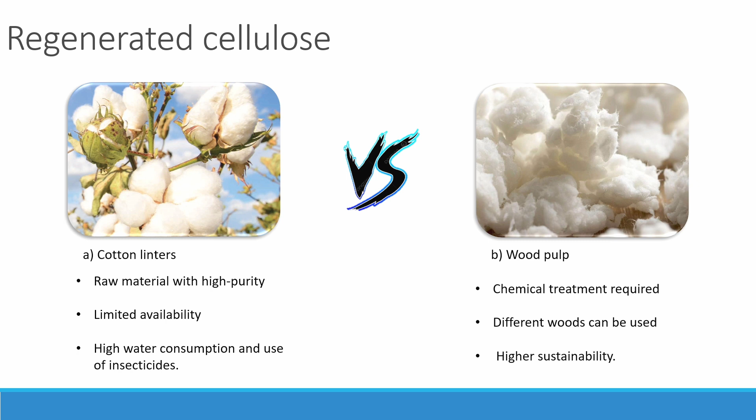Dissolving pulp is a raw material to produce regenerated cellulose. These are the 2 types of raw materials that can be used. On the left side, we have cotton linters - high purity cellulose fibers already, requiring less chemical treatment compared with wood pulp. However, the textile market is increasing, and there's difficulty scaling up cotton linters, maybe because of the use of insecticides and water consumption.

On the other side, we have wood pulp, already talked about a lot in this event, which requires higher chemical treatments. However, we have advantages that we are exploring.

Dissolving pulp by the prehydrolysis kraft method is the objective of my PhD study. We already have some studies about the valorization of hemicellulose removed during the prehydrolysis, and I will also present later the valorization of lignin. The objective is to produce a cellulose fiber with high cellulose content, as already talked about before.

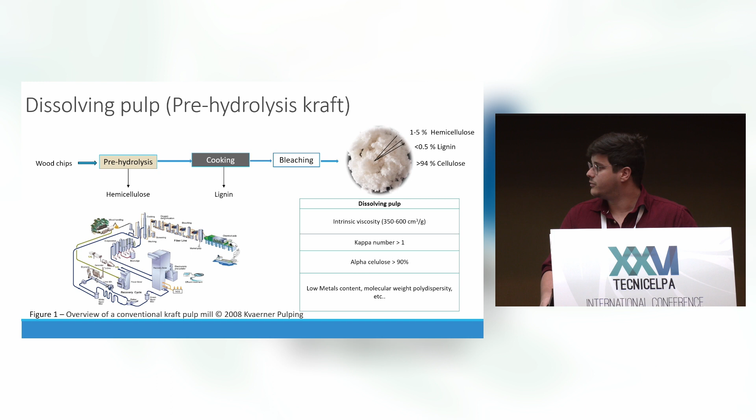We have specific conditions to produce a good quality dissolving pulp, such as the intrinsic viscosity that was shown in the other room - the importance of this parameter to dissolve it. The kappa number must be low, alpha cellulose must be higher, and it's important to have low metal content, focusing on the recyclability of the solvent used to dissolve the pulp.

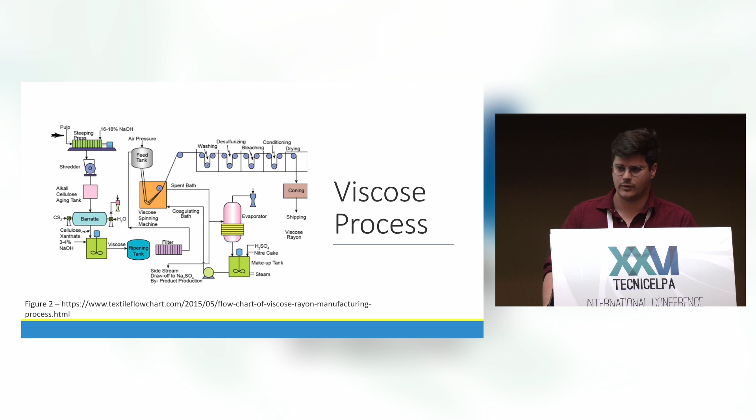So we are working a bit with the viscose process, where we use carbon disulfide to dissolve and produce the dope of the fibers. The dope is then, by electrospinning for example, regenerated and washed in the later phase.

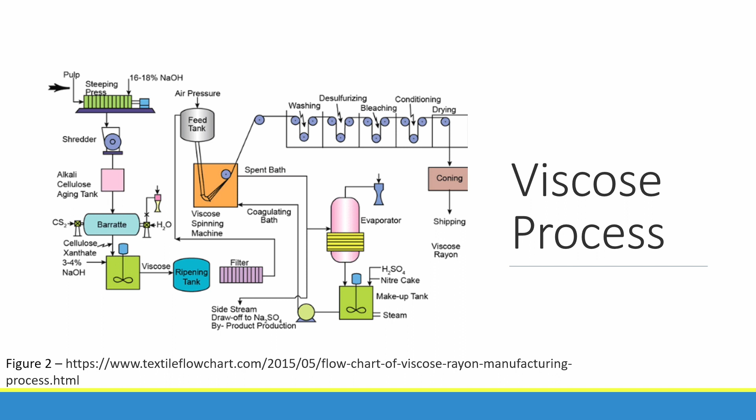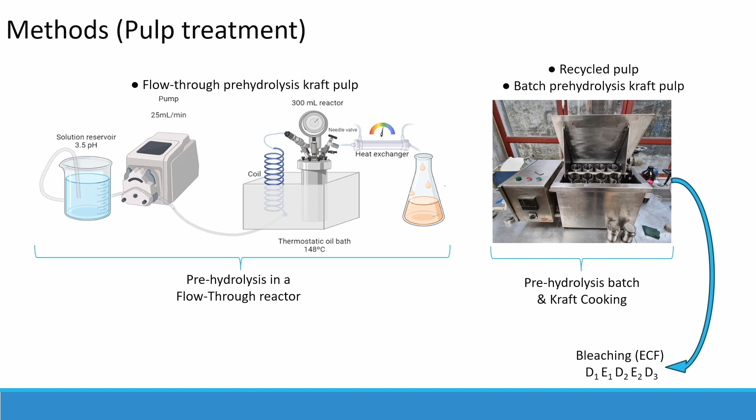The other part of the project, we worked with recycled pulp - pulp at the end of its life of utility. It has specific characteristics that are more difficult to work with. For both pulps, we did the kraft cooking in the batch system, so the only difference is the prehydrolysis reactor.

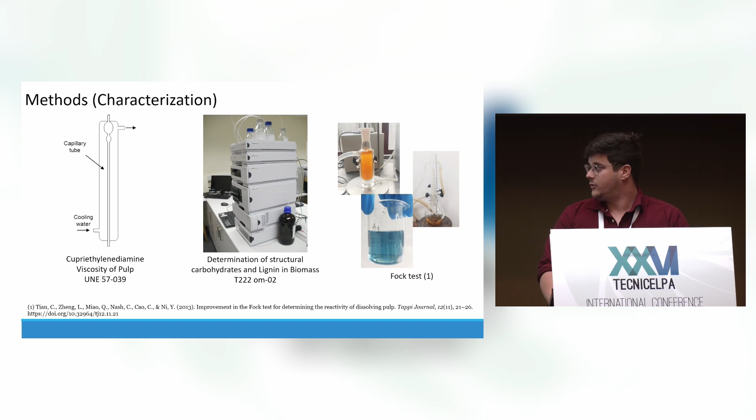Regarding characterization, as I mentioned before, it's important to follow the viscosity of the pulps. We also studied the composition of the pulps, and we did the Fock test, which is a mini scale version of the viscose process.

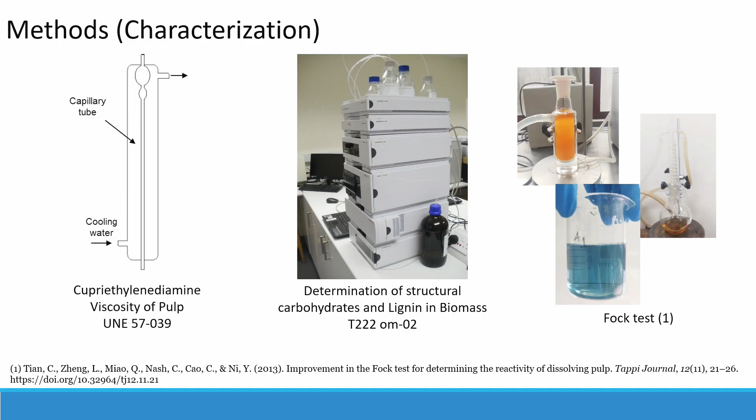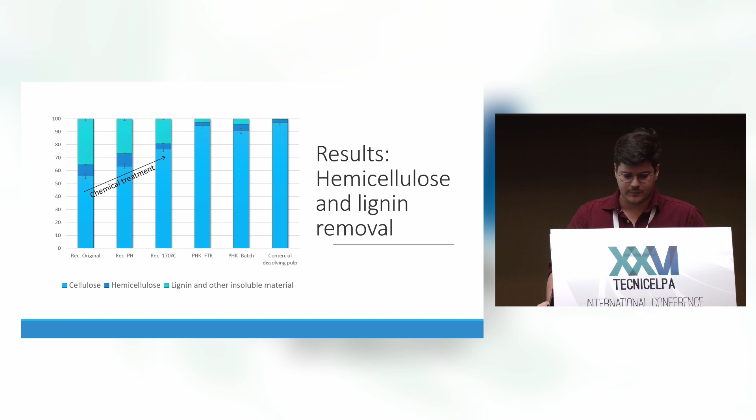When comparing the flow-through and the batch system employed in the prehydrolysis sequence, we can see that the flow-through reactor has produced pulps with higher cellulose content. That was one of the objectives and one of the interesting results of employing this prehydrolysis.

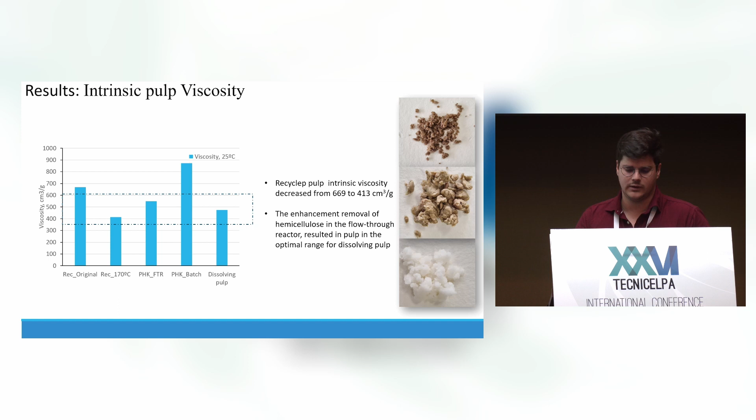Regarding intrinsic viscosity, we can see that the treatment employed in the recycled pulp decreased the value to a better quality, aiming for dissolving pulp, so between 350 to 600. The prehydrolysis kraft with the flow-through reactor also reduced the intrinsic viscosity to optimum values to produce dissolving pulp.

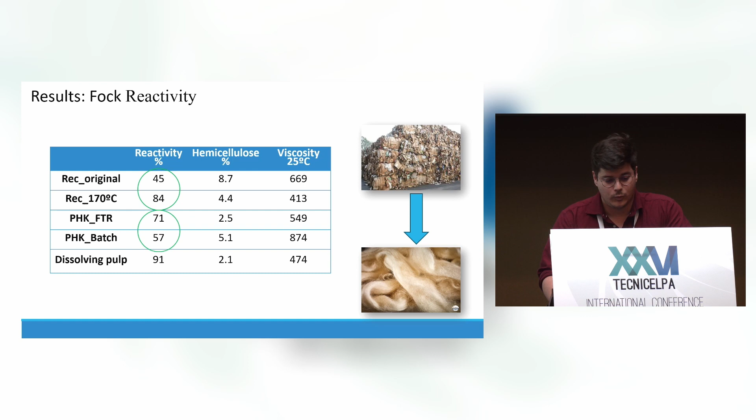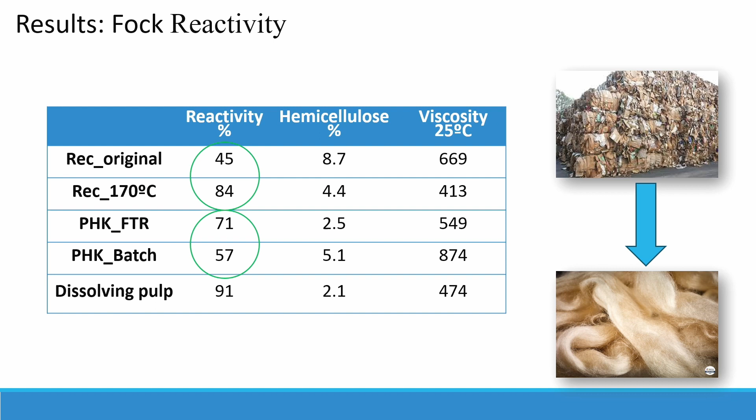Regarding reactivity, we have interesting results, particularly with the recycled pulp. We almost doubled the FOCK reactivity of this pulp when employing the two chemical treatments. One interesting point is that we cannot remove a lot of hemicellulose in this process due to the characteristics of this pulp; however, due to reduced viscosity, we have this increase in reactivity. Regarding the flow-through, as seen before, it's a pulp with higher purity, and this translates into higher reactivity. They're still a bit far from commercial dissolving pulp, but it's a method we need to optimize.

This is where the future work comes in. One of the interesting results was the increase in FOCK reactivity in the recycled pulp, so we can produce pulp from end-of-life pulp and enter the circular economy with this type of pulp.

Regarding future works, we'll try to individualize the different pulp characteristics, such as kappa number, crystallinity, porosity, and surface area, that can impact the FOCK reactivity, and try to individualize the different aspects of it.

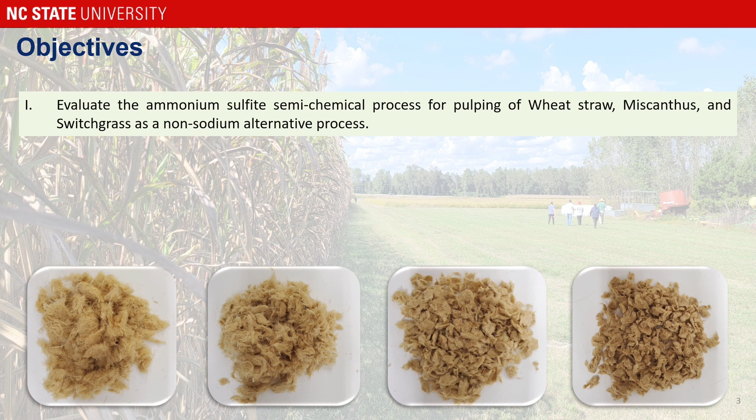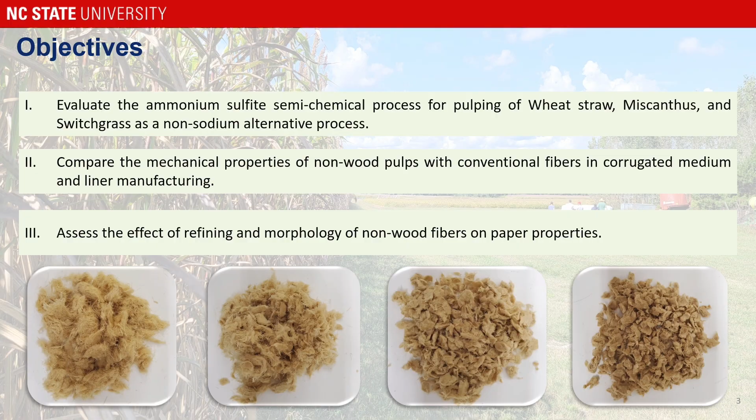The second objective is to evaluate the mechanical properties of these fibers to be used in corrugated medium and liner manufacturing. We also want to evaluate the morphology of those fibers and what kind of relationship it has with the mechanical properties of these grades.

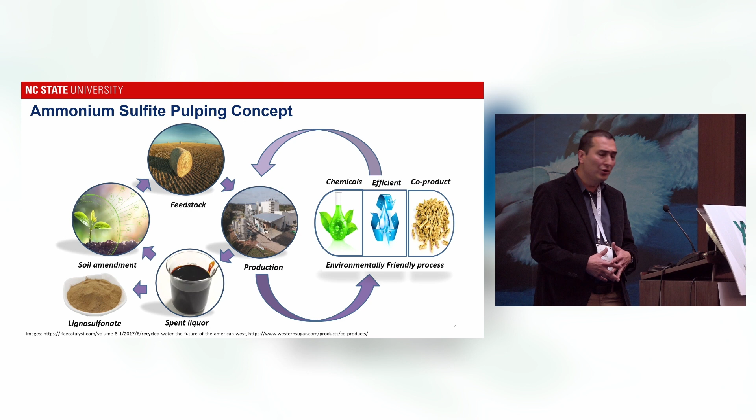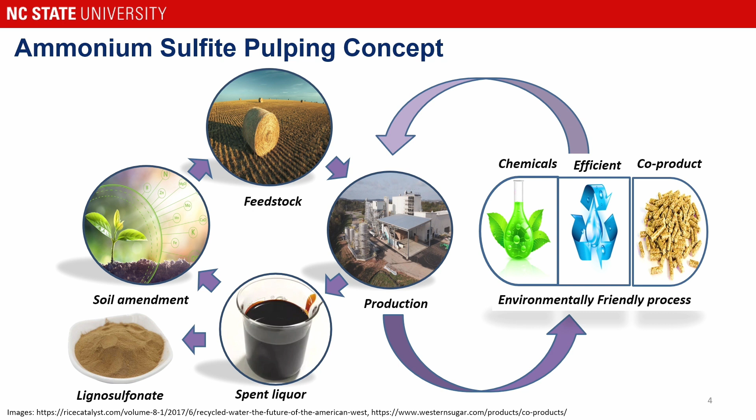As an overview of the process, you might wonder why we are using ammonium sulfite on non-woods. The reason is because we can integrate a more environmentally friendly process for non-woods at a small scale. As in a previous presentation, you might know that sulfite can be used in a pulping process, and we can obtain a spent liquor to be used in different applications. For example, the spent liquor from the sulfite process could be used as a soil amendment, or we can obtain more valued products such as lignosulfonate from this spent liquor. So basically, this is the idea.

As a methodology to evaluate this feedstock, we are using a systematic way to test these feedstocks. First, we did a pre-treatment of the feedstock, including hammer mill and screening.

Then we applied different conditions to obtain the fibers, doing a pulping using a systematic way: 50% of the total SO2, a liquor to wood ratio around 4 to 1, and a temperature of 170, which are common process conditions to obtain pulp.

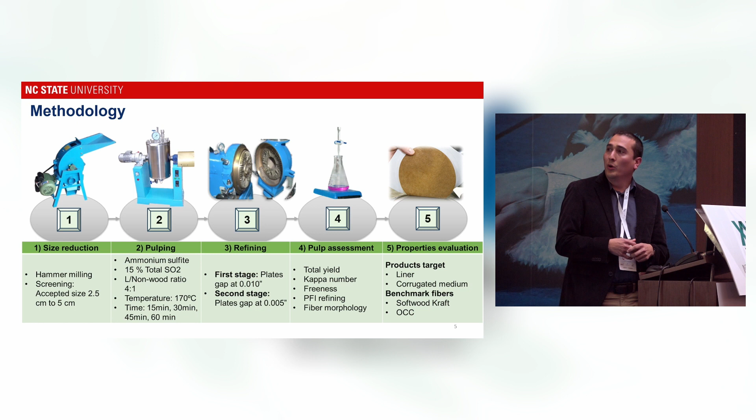As you can see, we are changing the cooking time, and we want to see the effect of cooking time on those pulps. After pulping, we refine those pulps using 2 stages, and we evaluate total yield, kappa number, refining behavior, and fiber morphology.

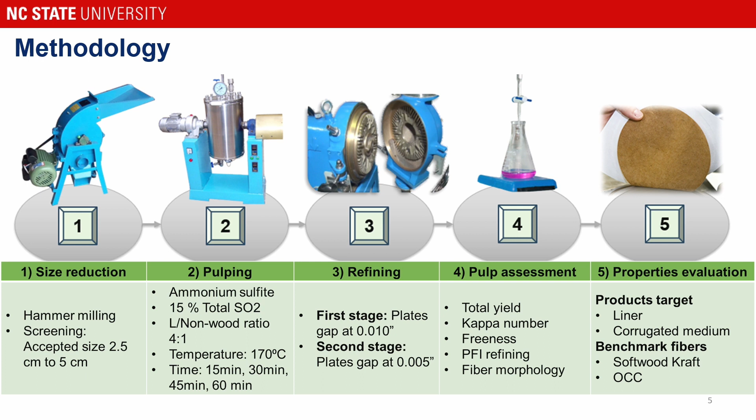Because we are short on time, I'd like to show a quick summary of the results. In this graph, for wheat straw, we compare the tensile index with conventional fibers such as OCC, which means old corrugated container board, and also with softwood, common raw materials for liner and corrugated medium. Something interesting is that when we change the cooking time, we can obtain similar properties to OCC and even close to softwood fibers.

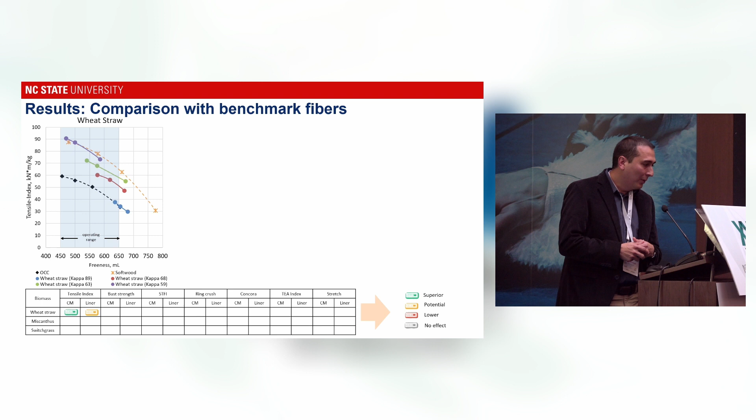It's important to mention that one concern is the drainability of those pulps in the paper machine, and we know these properties depend on refining. So in this study we considered an operating range in order to improve the properties by refining.

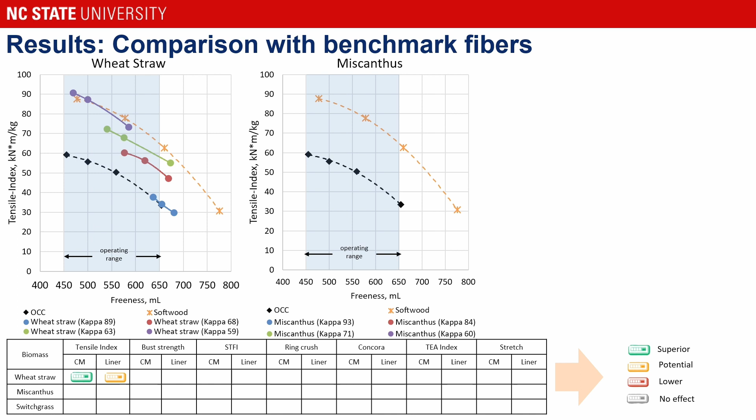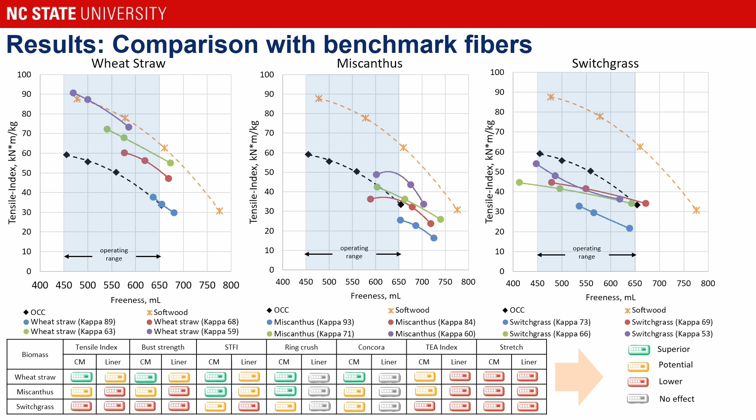Let's see what happened with miscanthus. We see the same behavior, a little lower than the benchmark fibers, and for switchgrass we saw lower properties than OCC. What's interesting is when we evaluate all the main properties for corrugated medium and liner, we see that those fibers have the potential to be used, at least in corrugated medium.

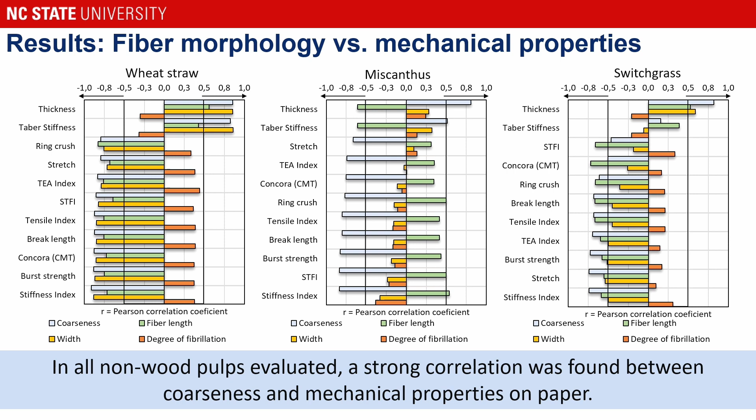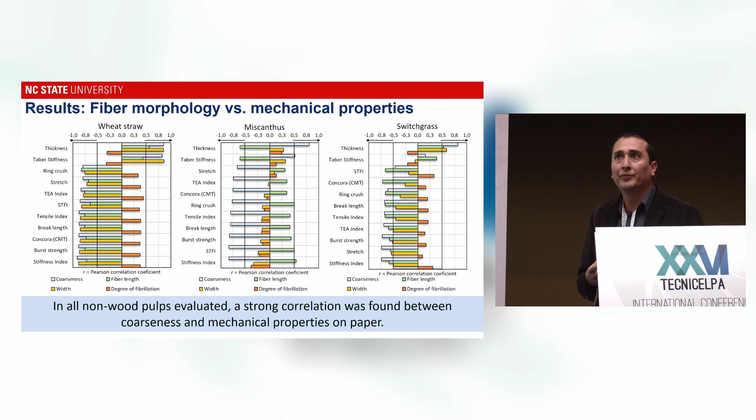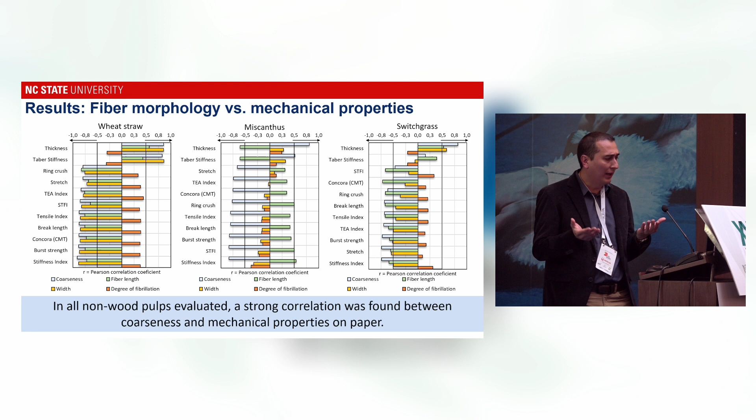Finally, we did morphology analysis, and we realized that when we compare the coarseness value, a common measurement for fibers, there is a good correlation with several mechanical properties and the coarseness value. This is important because we can estimate, depending on the coarseness of those pulps, how they are going to perform as paper properties.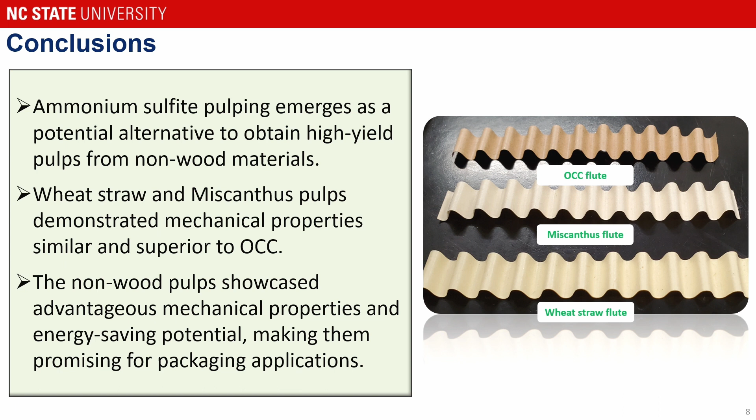As a conclusion, we believe that by using ammonium sulfite to process these non-wood materials, there is potential to be used in packaging, at least in container board application. Thank you so much.

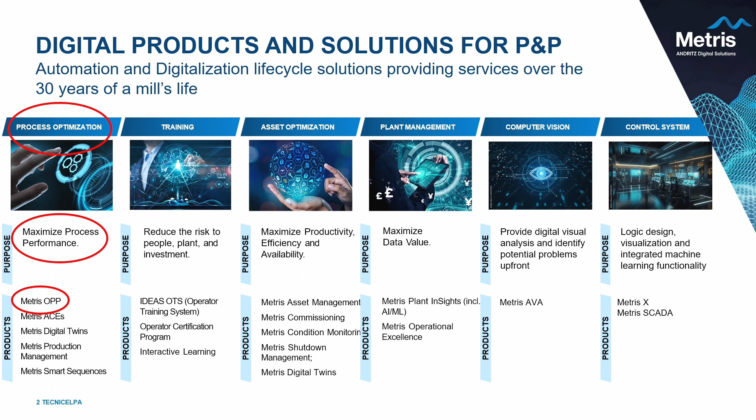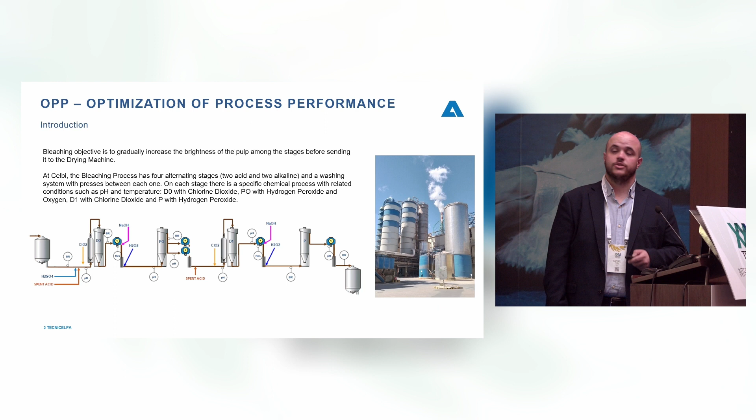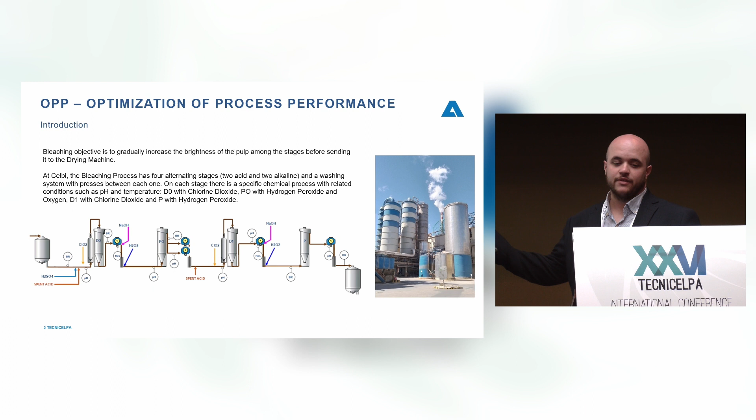Now going back to the project we developed at Celbi Mill on the bleaching area. Here's a quick introduction of the bleaching, a photo and layout of the bleaching at Celbi with 4 bleaching stages, 2 with chlorine dioxide and 2 with hydrogen peroxide. They are intercalated stages, and the main objective of bleaching, as almost everyone knows, is to gradually increase the brightness of the pulp among those stages, reaching the final set point to send it to the drying machine.

Here's the method to optimize the bleaching performance. We developed 8 APCs. The focus of the APCs is the bleaching, the brightness, and the pH on each stage. We have 4 stages, so 1 pH control APC and 1 brightness control APC for each of the stages.

The main focus is to keep the quality. The quality is the target of each stage brightness. Beside that, we have to optimize chemical consumption and optimize the chemical reaction efficiency.

For the brightness controls, we consider a set point sent by the operators of the area, the brightness measurement, and the measurement on the previous stages. If we had some disturbance on the previous stage, we have to compensate it on the next stage. We also consider stage production, pulp consistency, and the concentration of the chemical used for each stage. Our outputs are the specific dosage of the chemical used on the current stage and the flow of the chemical.

For the pH stages, we consider the set point provided by operators and the pH measurements, the stage production, the pulp consistency, and the concentration of the pH chemical. The outputs will be the specific dosage and also the pH chemical flow.

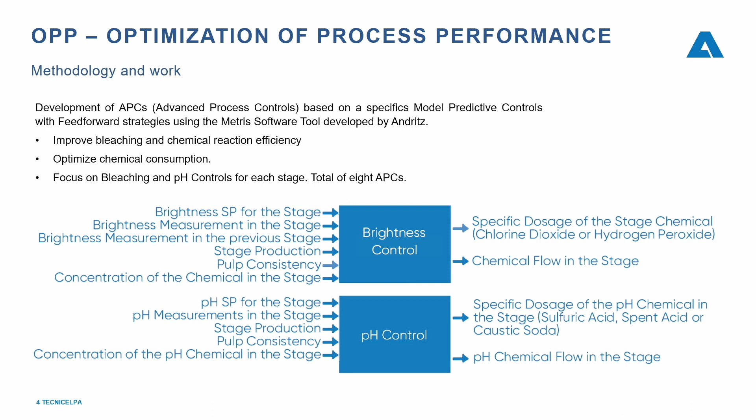So that's a MIMO APC. It's based on MPCs, a MIMO control based on MPC with some feed-forward strategies, and we also use some logic strategies to deal with singularities of the mill.

Results from our control show a more stable brightness at the end of each stage, and mainly at the final pulp. As I said before, the main objective of the control is to keep the quality, reach the final set point, and reach the target of the mill brightness. With a more stable brightness, we have a reduction of 27% on the standard deviation of the final pulp brightness with the APCs developed in the mill.

Another big benefit is to automatically deal with daily process disturbances. Operators are there to help, but the control is also there to help with their daily routines.

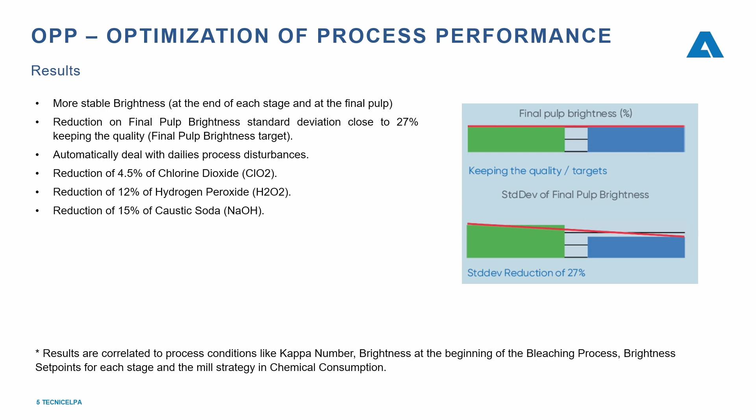Considering the chemical consumption, we have a reduction of almost 5% on chlorine dioxide, near 12% on peroxide, and 15% on caustic soda. What I have to add is that bleaching is after the cooking process, so the cooking process and cooking conditions, like the kappa number and the brightness of the pulp going to bleaching, are important variables that will totally be related to our results.

That's a quick overview of the project we have developed.

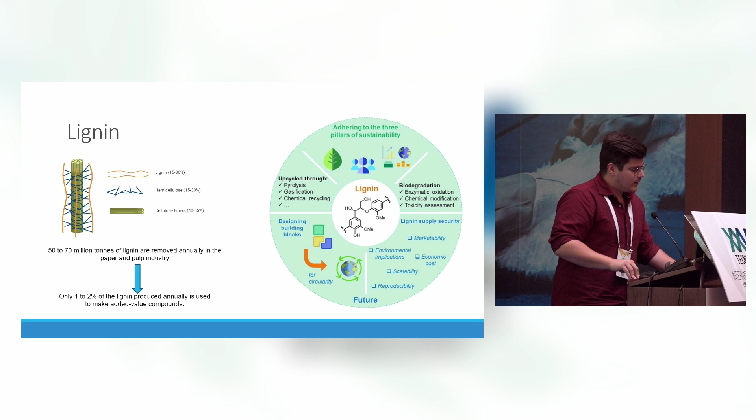As we've seen, lignin will be a pathway to increase the biorefinery concept in our industry, the paper and pulp industry. It belongs to the three pillars of sustainability, such as environmental, social, and economic. One thing we want to improve is that only 1 to 2% of lignin produced is converted to added value compounds. It's a low number that we want to increase.

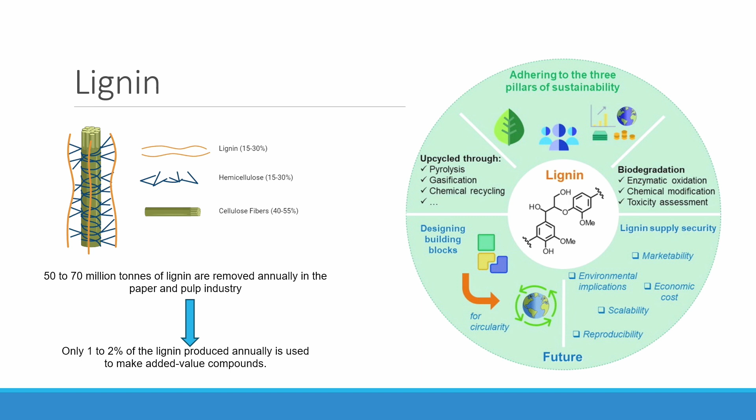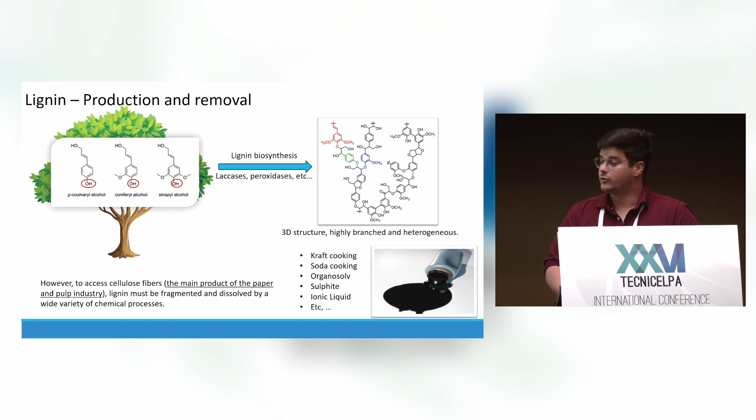So where can we find lignin? Lignin is produced in the cell wall, and it's based on three monomers, namely coumaryl, coniferyl, and sinapyl alcohol. In the plant cell wall, the enzymes laccase and peroxidase oxidize these hydroxyl compounds and produce radicals. By the interlink between the different radicals, the famous lignin structure is produced.

However, in the paper and pulp industry, we don't want it in the main product, the cellulose fiber, so we need to remove it. There's a wide variety of techniques to remove it, such as Kraft cooking, soda cooking, sulfite, ionic liquid, and more. In this work, we'll study removal with soda cooking, mainly due to the non-existence of sulfites in the lignin removed by this process.

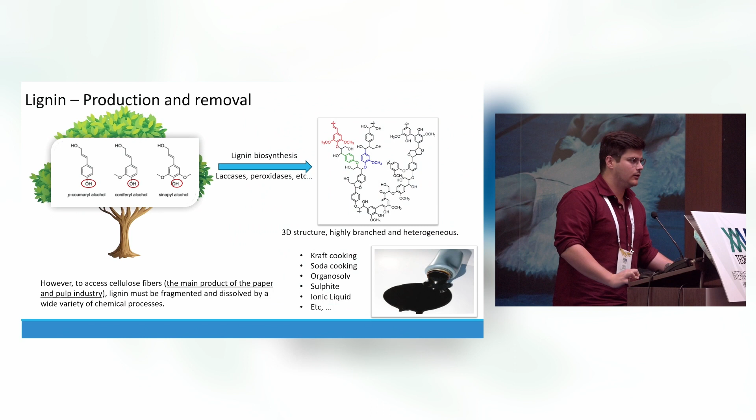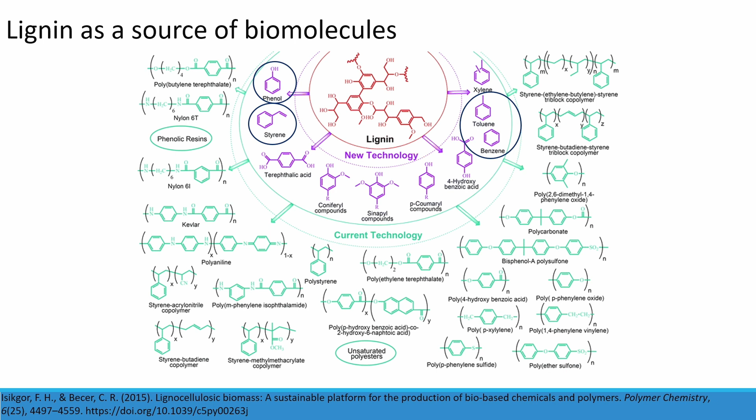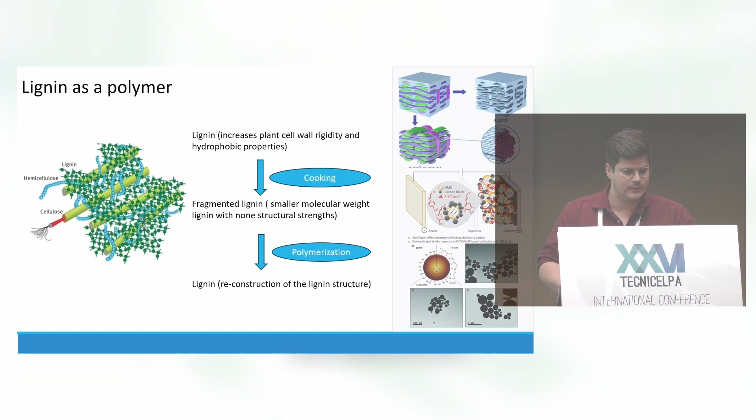Lignin can be valorized by further fragmentation. It can be a source of different compounds that can be applied to produce polyesters, such as phenol, toluene, benzene. There's a lot of compounds that we can process and valorize from lignin. However, in this work, we see lignin as a polymer, based on its natural function in the cell wall, which we want to replicate in composites, for example.

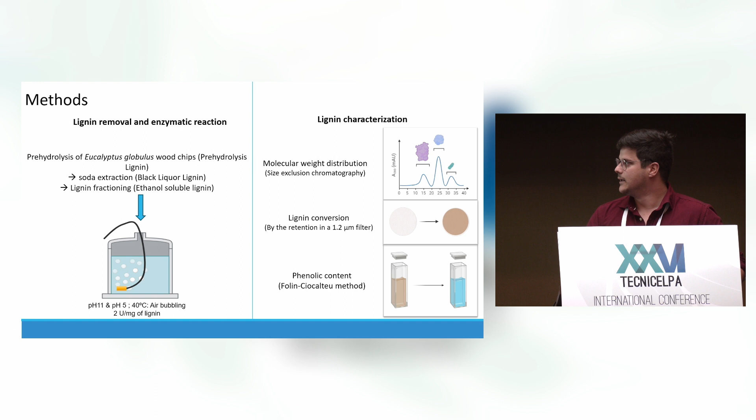So we have lignin, we dissolve it and we fragment it, and then we need to repolymerize it to achieve this function. For this, the method we applied, based also on my PhD project, we studied the prehydrolysis, in this case of soda cooking of Eucalyptus globulus wood chips.

We did the prehydrolysis to achieve a lignin with fewer contaminants, like the sugars from the hemicellulose. As mentioned before, the soda extraction will allow us to work with lignin with better characteristics for the aim of this work. This lignin can also be fractionated.

Yes, we can also do a solvent fraction of this lignin to achieve different groups of the raw material lignin. In this work, we also studied two different laccases, one with better reaction at high pH, and one at pH 5, to compare the results.

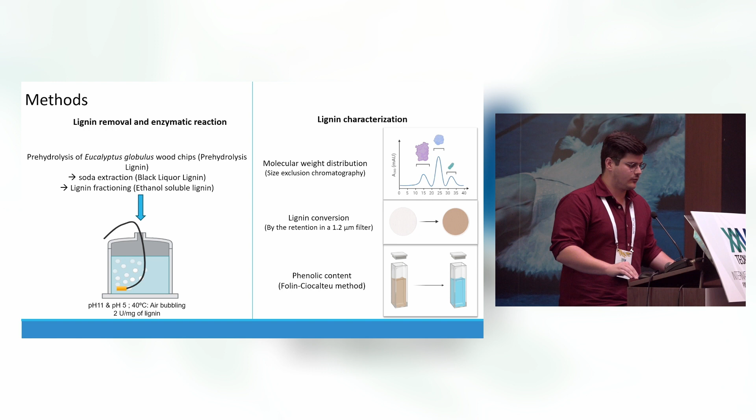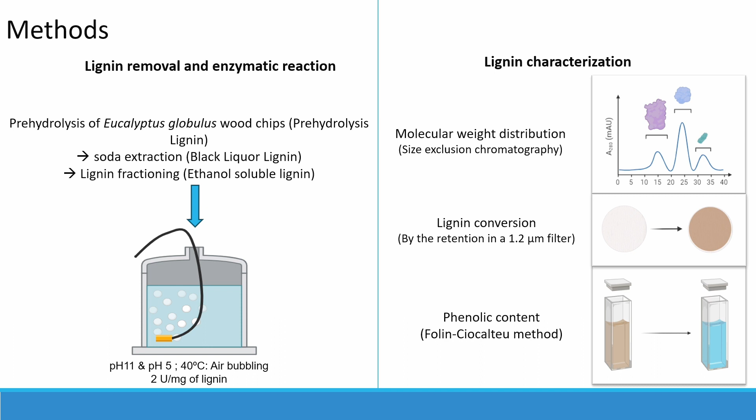Regarding the characterization, we analyzed the molecular weight distribution to see if the lignin is polymerized or if there's a decrease or increase in molecular weight. We also analyzed the lignin conversion, filtering the solution after treatment and analyzing how much material is withheld in the filter, and we also studied the phenolic content, which measures the hydroxyl groups available for the reaction.

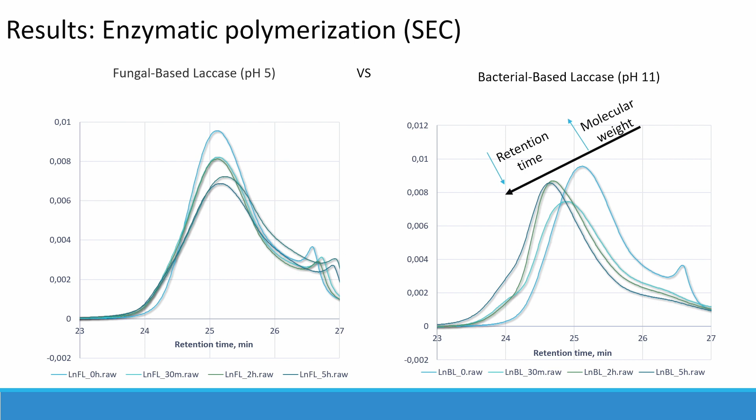I will start with the molecular weight distribution between two different treatments with two different laccases. The main difference is when we apply the bacterial-based laccase with higher pH, we can see that the lignin peak is inferior with treatment time. By this means, we have a lignin with higher molecular weight, showing the polymerization.

So the next step was to study why we have different behaviors for laccase. What we see is we can start by the peak size, the signal of the method we studied. We can see that the lignin at pH 5 has inferior solubility, meaning it's less reactive for the treatment employed. On the other side, we have higher solubility at high pH.

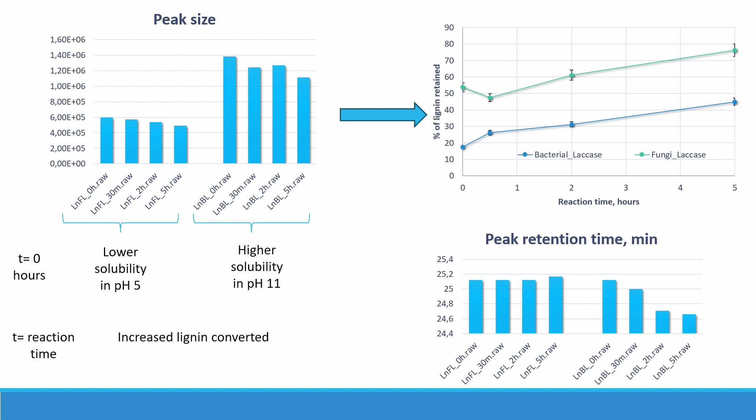These results are in concordance with the filter measurement, where we can see that with the lower pH used, we have higher lignin starting from the 0 reaction time.

As mentioned before, one of the main differences is the retention time of the lignin peak, and we can see that with the bacterial laccase we have a decrease of it, representing the increase in molecular weight. So we decided to go for this lignin.

The next step was to evaluate how different substrates interact with the enzyme. We studied what we call the black liquor, from the soda extraction, at different concentrations - 1 gram of lignin per liter and higher concentrations. We also studied the fraction soluble in ethanol, and the prehydrolysis lignin, which is different.

The molecular weight is inferior, and in theory it should be more reactive, but due to sugar contaminants, we didn't see those results.

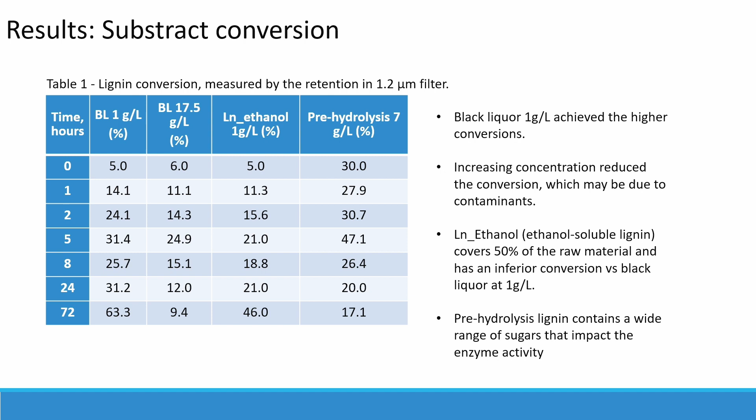One more point about this table is the comparison between the direct treatment of black liquor at 1 gram per liter and the fraction soluble in ethanol. In theory, we think the ethanol-soluble lignin is more pure, more purified, more clear. However, the reactivity with the enzyme is inferior.

This is because of the fractionation method we used. We solubilize lignin in isopropanol, ethanol, and methanol, and the more reactive fraction of lignin is soluble in isopropanol. So we removed the higher reactivity lignin. However, we studied the ethanol-soluble fraction because it covers 50% of the raw material.

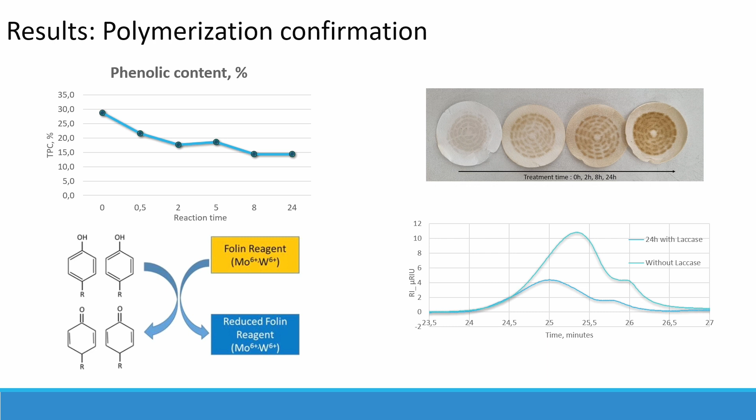Regarding the phenolic content, as mentioned before, it analyzes the hydroxyl groups of our material. We can see that with treatment time, it decreases. This means that with the laccase treatment, we achieve denser structures and higher molecular weight. The figures are just a more visible example of the polymerization we achieve.

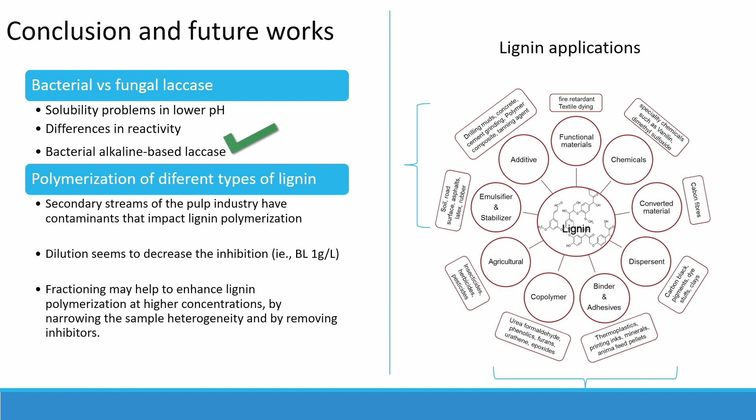To summarize, we studied two different laccases. We achieved better results with the bacterial alkaline-based laccase. We also studied the use of different substrates of lignin, and further work will focus on finding applications for this polymerized lignin in composites. Thank you again for your attention.

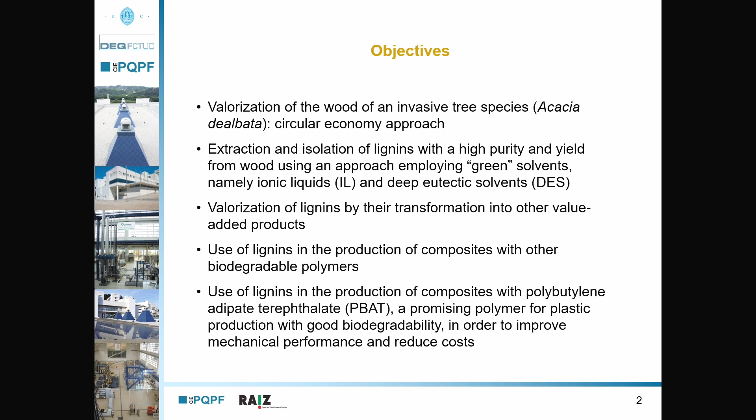The objectives of this work were valorization of the wood of an invasive tree species. In particular, we have valorized Acacia dealbata: extraction and isolation of lignins with high purity and yield from wood, using an approach employing green solvents, particularly ionic liquids and deep eutectic solvents. Valorization of lignins by transforming them into other value-added products. Use of lignins in production of composites with other biodegradable polymers, and in particular, use of lignins in production of composites with polybutylene adipate terephthalate, a promising polymer for plastic production with good biodegradability properties, aiming at improving mechanical performance and reducing costs.

The experimental part comprised two sections. The first was the lignin extraction and isolation from wood, which had two main steps. First, extraction using ionic liquid or deep eutectic solvent of the lignin from wood, enabling a first fraction, which is cellulose-rich material, and a dissolved fraction, which contained lignin. From the dissolved fraction, after adding water, we could easily precipitate the lignin-rich material.

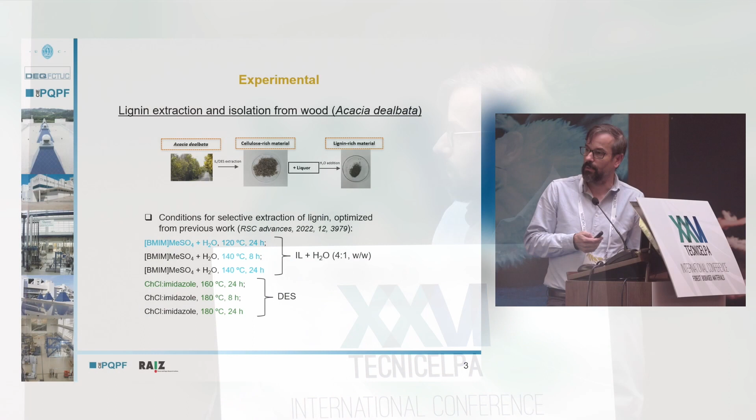We used an ionic liquid, which was butyl-methylimidazolium methyl sulfate, mixed with water in the proportion of 4:1, and as a deep eutectic solvent, choline chloride-imidazole solvent. The extraction with deep eutectic solvent required higher temperature, but afforded a more selective extraction of lignin. The conditions for extraction of lignin were optimized from a previous published work.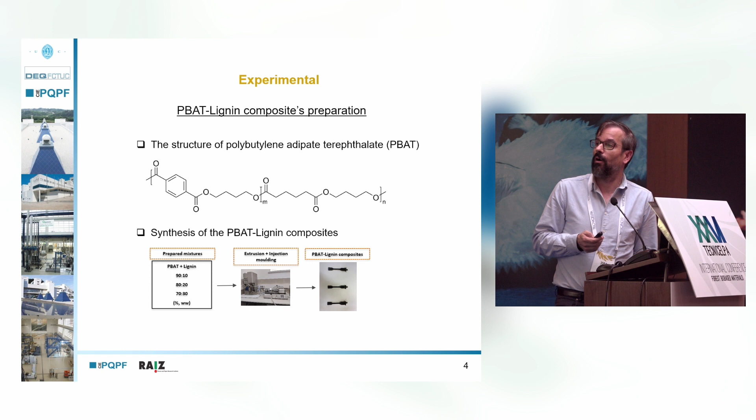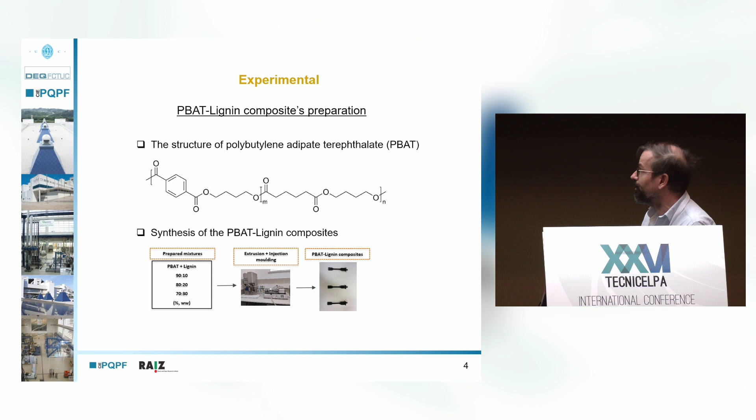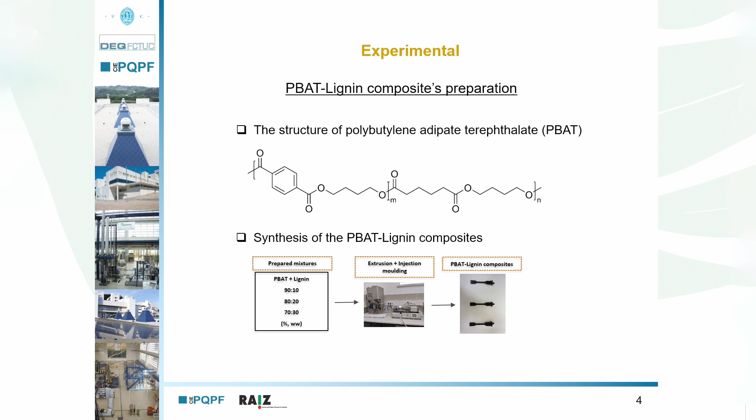These composites of PBAT and lignin were obtained by extrusion plus injection molding. Mixtures with 10, 20, and 30% of lignin were prepared. The composites were shaped in the dog bone format, as you can see in the figure. This format can be obtained by the injection molding process we have used.

As for the results, I don't have too much time, so I will speak of just a few results. I will not extend too much into the results. I will speak about some results of lignin extraction and isolation.

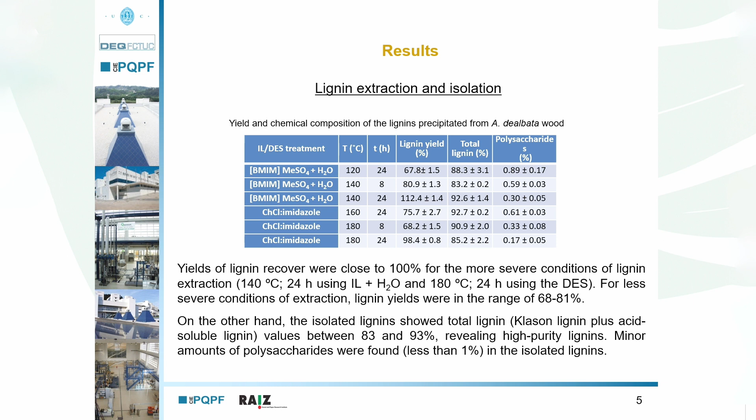Here in the table you can see the yield and chemical composition of the lignins precipitated from acacia dealbata wood. You can see yields of lignin recovery close to 100% when using more severe conditions of lignin extraction. When using less severe conditions of extraction, lignin yields were in the range of 70 to 80%. As for the purity, the isolated lignins show total lignin values between around 83 and 93%, revealing high purity lignins. The analysis of polysaccharides revealed only vestigial contents, less than 1%, in the isolated lignins. So we have obtained lignins with high yield and high purity.

These are only a few results on thermal stability of the lignins. There is other characterization data of the lignins, but I will only present a few data. Thermal stability is important, especially if you are going to make composites with other polymers.

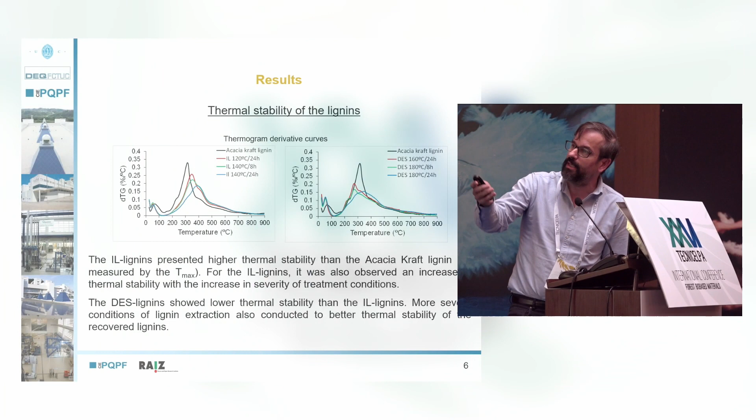Here, there is another lignin. In the pictures, you can see the lignins obtained by extraction with ionic liquid, the lignins obtained by extraction with deep eutectic solvent, and another lignin, a KRAFT lignin. This lignin was our reference. How did we obtain it? We performed a cooking of acacia dealbata up to a kappa level of around 16, and from the black liquor of this KRAFT cooking of acacia, we obtained lignin by precipitation with acid. So this is our reference, the acacia KRAFT lignin, and as I will show later, it can also be a good approach for the valorization of lignin.

But returning to thermal stability, you can see that the lignins obtained by extraction with ionic liquid present higher thermal stability than the acacia KRAFT lignin. The acacia KRAFT lignin was obtained from the same wood sample, but based on the KRAFT cooking process.

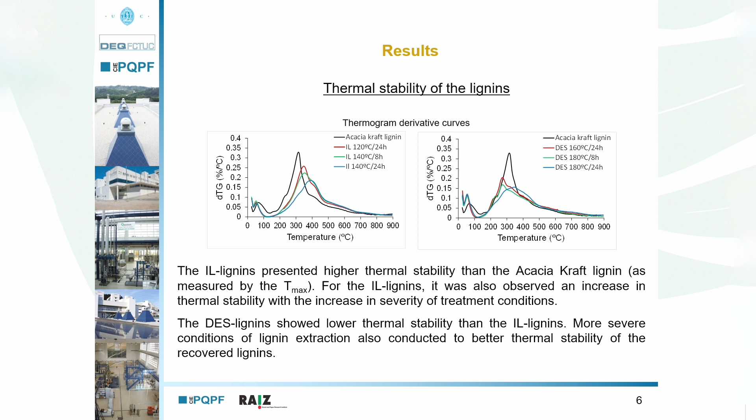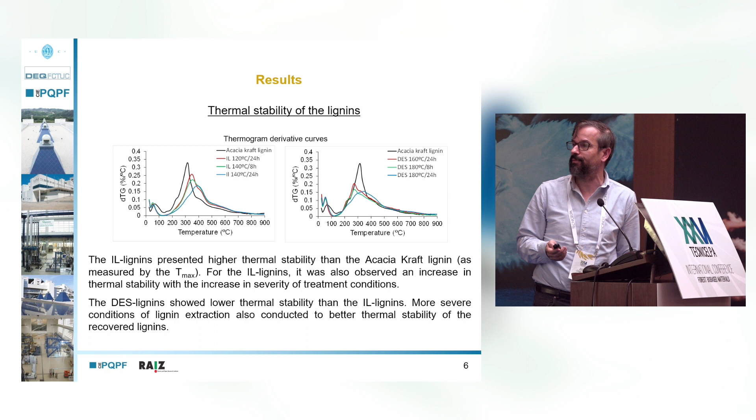The ionic liquid lignins show an increase in thermal stability with increase in severity of treatment conditions. Higher temperatures and higher extraction times produce lignins that are more thermally stable. As for the lignins extracted with eutectic solvent, these show lower thermal stability than the ionic liquid lignins, but again, more severe conditions of lignin extraction also lead to better thermal stability of the recovered lignins.

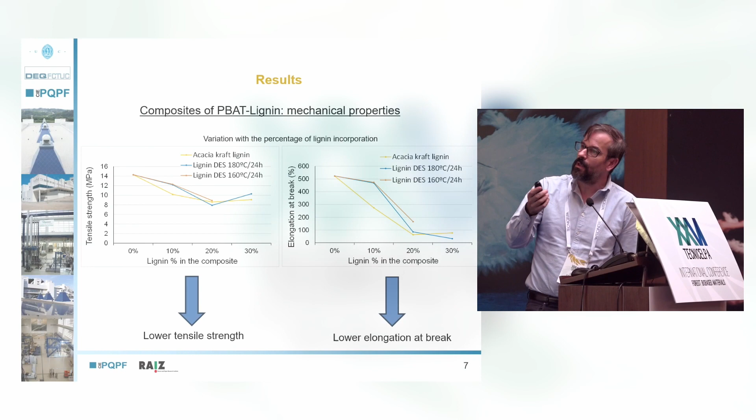The most important part of this presentation, I think, is the results for the composites of PBAT with lignin. I'll just show, once again, only the mechanical properties. There is other data, but I don't have time to show it here. As for the mechanical properties, we can see the variation of tensile strength and elongation at break with lignin percentage in the composite, ranging from 0%, only PBAT, up to 30% lignin.

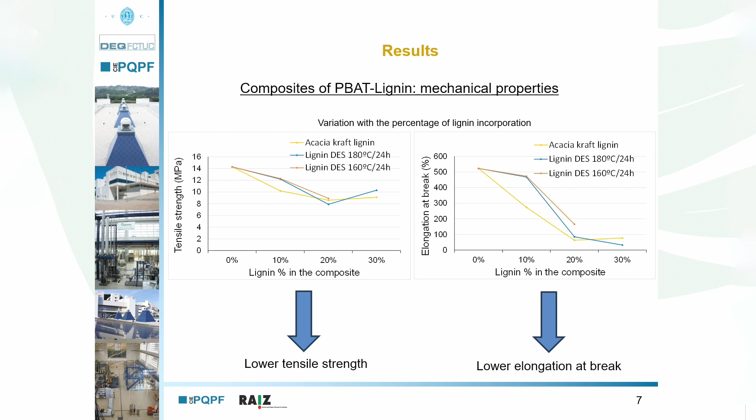You can see on the left that the tensile strength decreases, not very much, but it decreases, and then from 20 to 30% it almost reaches a plateau, and sometimes can even show a slight increase. As for elongation at break, it's reduced up to 20%, and from 20 to 30% it's almost the same. Elongation at break of PBAT is very high - this polymer is very ductile, with an elongation at break of 500%. So even though elongation at break decreases, the final values are not so bad at all. So you have lower tensile strength and lower elongation at break with lignin incorporation in the composites with PBAT.

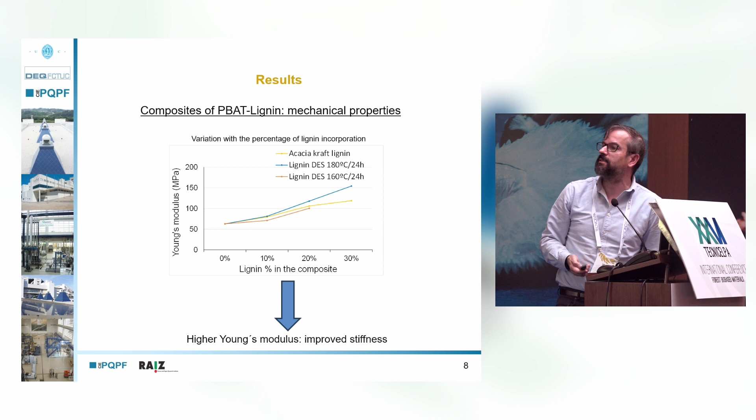We can see that stiffness is improved. The Young's modulus for PBAT alone is around 60 to 70 megapascal, and for mixtures with 30% lignin, we have Young's modulus up to 150 megapascal. Although the best results were obtained with lignin extracted with eutectic solvent, results with acacia KRAFT lignin are also good, so it can also be an interesting option.

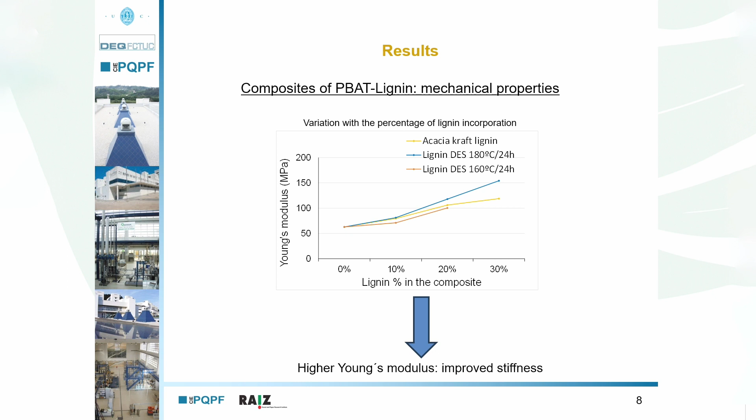Final conclusions: it was possible to obtain high purity lignins, with more than 90% purity, from the wood of Acacia dealbata, with yields of lignin recovery approaching 100%, using either ionic liquid or deep eutectic solvents for the extraction of lignin, followed by precipitation of lignin with water. So these are good results. Some of the lignins were more thermally stable than the KRAFT lignin obtained from the black liquor of Acacia dealbata cooking. However, this doesn't mean the KRAFT lignin is worse, it's just a result - as you can see, acacia KRAFT lignin is also a good option.

When lignins were used in production of composites with PBAT, we obtained lower elongation at break and higher Young's modulus values, compared to PBAT alone, which means that stiffness was improved with lignin incorporation in the materials. Finally, regarding the conclusions, we can say that for the particular case of PBAT, lignin seems to be a good approach to improve some mechanical properties and eventually to reduce costs, because we are talking about a subproduct of pulp production that most of the amount is burned.

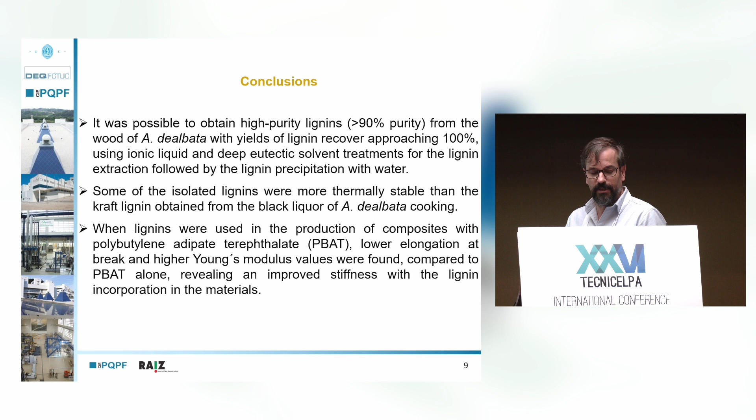The acknowledgements are to the Chemical Process Engineering and Forest Products Research Center and to RAIZ, where the cooking of Acacia dealbata was carried out. Thank you very much for your patience.